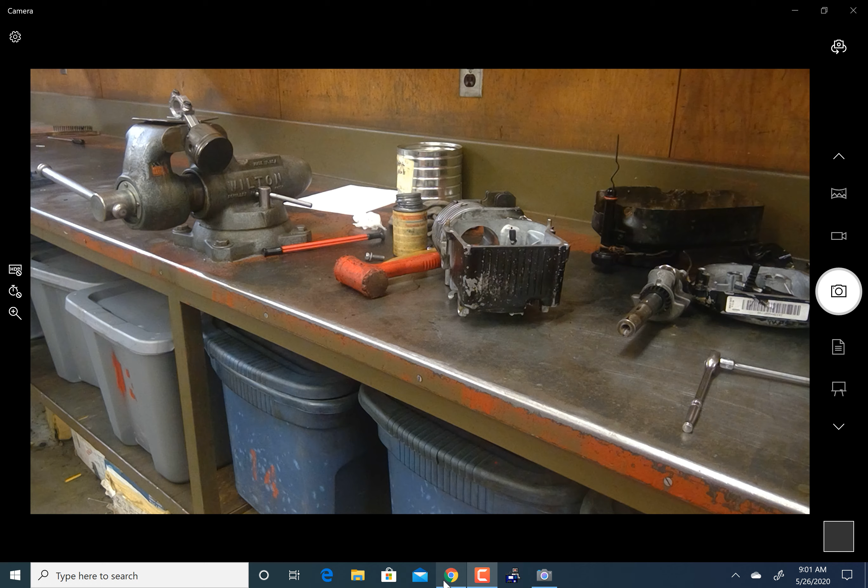Oh, hey, I feel like we were just here. It's time for sheet 7, kids.

Sheet 7 is all about putting in the piston and the rings. That's a pretty straightforward piece of this. If you've seen the 318 video, you've seen me do this.

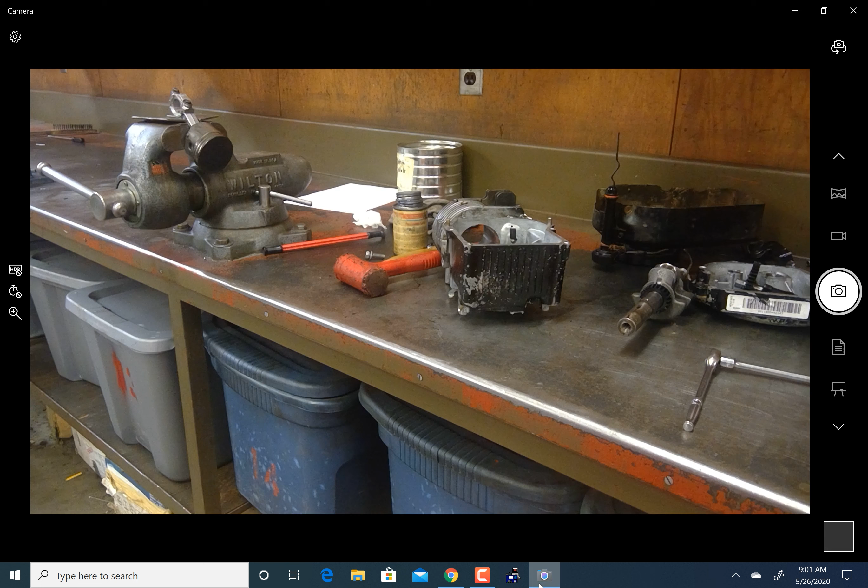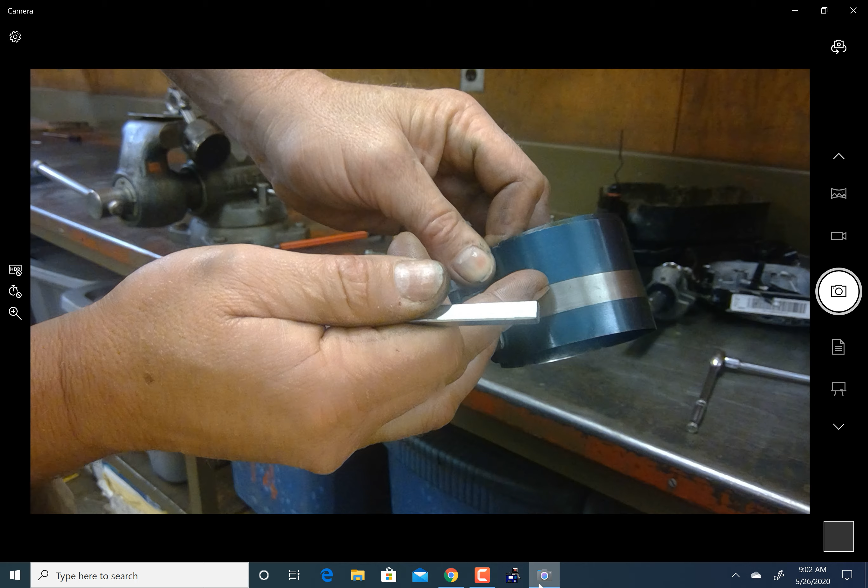We have a smaller version here of the ring compressor I used on the other one. Always want to have the band closest to the cylinder. If you put this side down toward the cylinder instead, it wouldn't be gripping the rings as tight, and they could actually splay out a little bit before you get it in, and then you'd have a problem. That is no bueno, senor, no bueno.

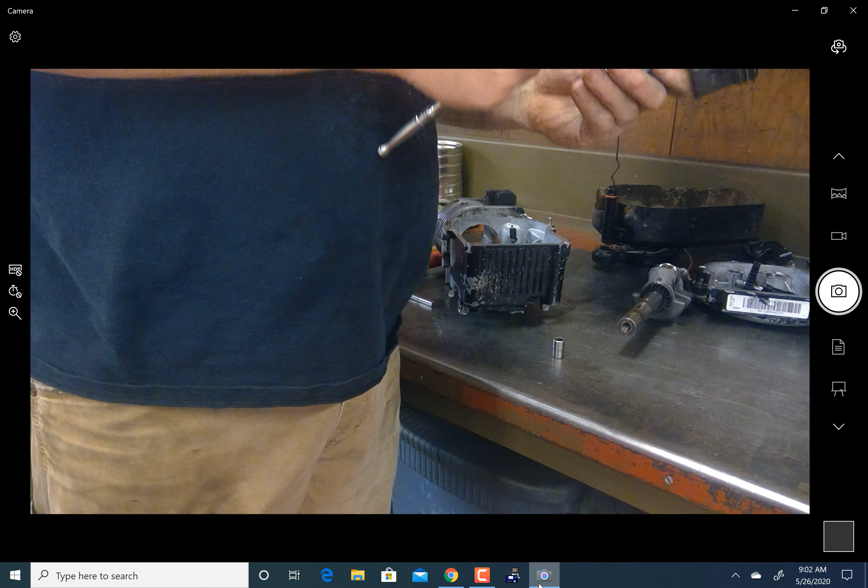Now, some dingbat left the connecting rod on this, which is not the end of the world. It was me, obviously. Don't get yelled at for this, that wasn't Cadence's fault, it's my fault. But anywho, I'm going to go ahead and take it off if that's okay with you.

Judas Priest! It's like someone used a torque wrench. Anywho.

Good Lord. Anyway, so we are going to put this dog in. If you recall from the other day, we were doing it on the big engine. If you've seen those videos, which if you haven't, I don't know what your problem is and what you're waiting for. Worked long and hard on those videos. So anywho, we doing this.

Come on, Betsy, you got this. You got this. Now, there it is.

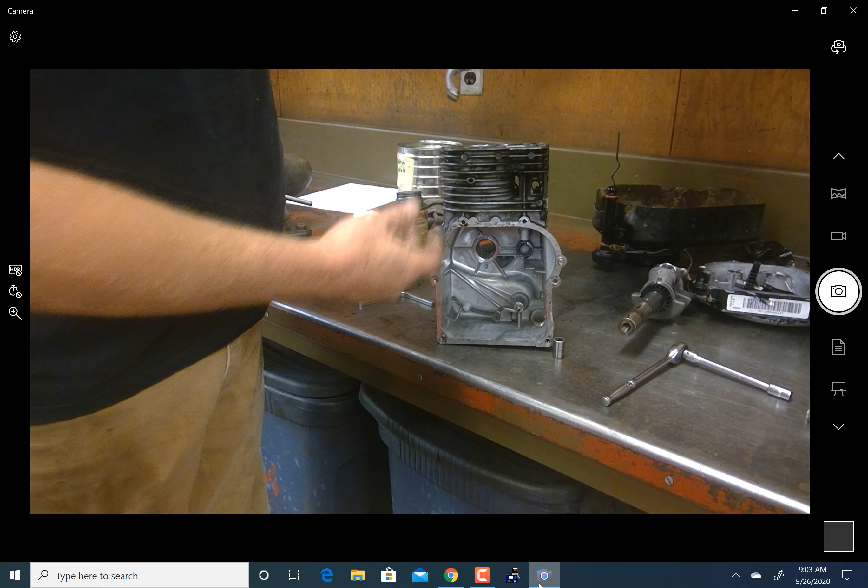Always want to remember when this goes in, we're going to do it so the open end faces toward the valves. Also remember that our ring gaps need to be spaced out, they just don't need to be lined up. Now, the page says about 120 degrees. That's cool, it's whatever. Only the compression rings really, really matter. So make sure they're spaced out good.

I'm going to grab some oil real quick. Apparently that ran off too. It's like everything's working against me today. OMG, Osh. OMG, Osh.

We are going to put a little bit of oil in the cylinder like we did on the big motor the other day. Just lube it up just enough to help slide it in.

Ordinarily, I would dunk these in oil as well. I was going to say it would make a big mess, but maybe pouring on it makes a worse mess. I don't know, I was just trying to save having to waste some oil and make a big mess, but apparently making a big mess happened regardless.

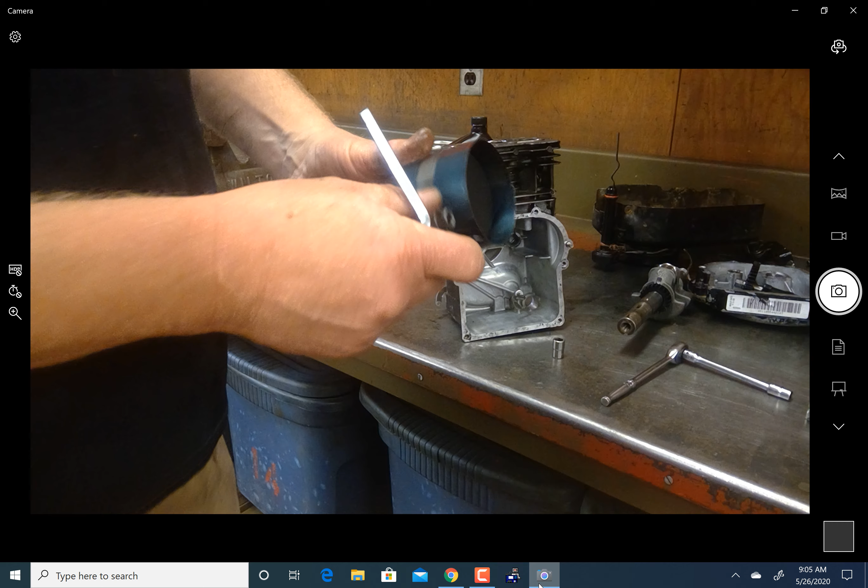Here we go. So we have it here. We're going to slide that over our piston and rings. Come on, get on there, you hippie. Now, you're going to want to have part of the skirt sticking out the bottom. You see that? Don't get carried away, you don't want this all the way to the bottom. If you go all the way to the bottom, what will end up happening is you have no real way to line up the piston with the hole properly.

Again, connecting rod, open end goes that way. This is a tricky one to run because unlike the one from the big engine, this one does not have a hold down lock situation. So I'm going to hold it with one hand and tap it in with the other.

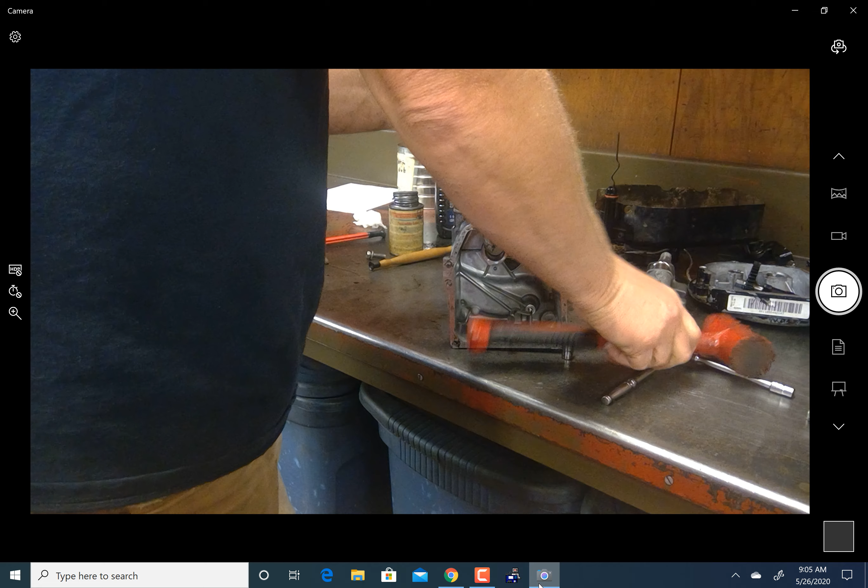Oh, it slipped on me. Darn it. Oh, I think she slipped. I might have to start over again. Darn it, she slipped on me. Rats.

Okay, so what had happened there was it slipped out of the bottom, the top compression ring slipped out before I was able to drive it all the way in. Worthless beggar. So I'm going to tighten her up again.

I'm going to go ahead and set it on the top of the piston there. The piston in tight, just inside. Oh, get up there where you belong, you hippie. Just inside the hole, I'm going to snug her up.

Now the tricky part is being able to hold it tight while tapping it. There, she's in. Woo! Now, you'll notice it twisted on me just a little bit. That's easily remedied, friend, okay?

Now, you don't want to get down too far because one of our next steps is going to be putting in the crankshaft. We got to leave room for him to go in.

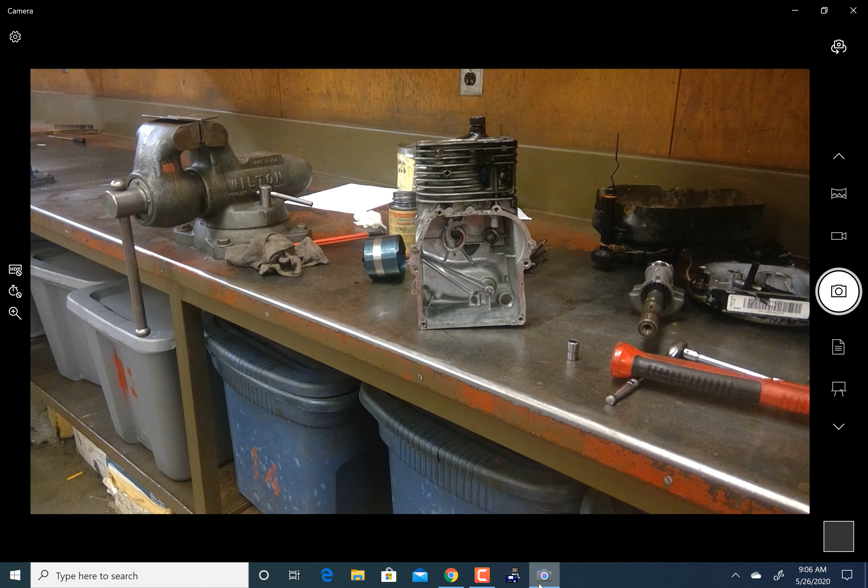Goodness sakes. These little engines aren't too much, but sometimes they're annoying because they're so small. I suppose it'd be like trying to work on a little kid, squirming all over the place. If you were a doctor, you know what I mean? A normal person would sit still, but a little kid is all over the place.

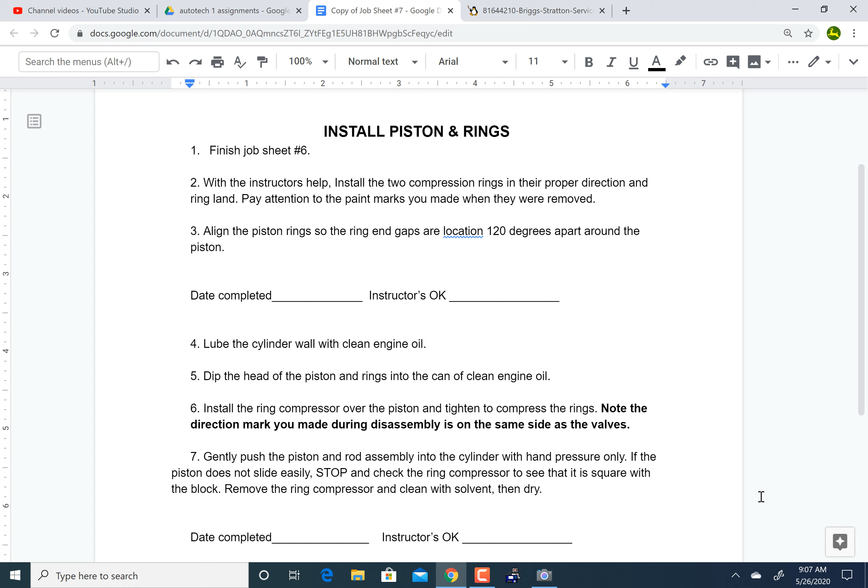Here we go. There we go, did that. What would happen if you put the rings in upside down? Listen, anything to do with rings has to do with compression. You with me? Boom, okay, done.

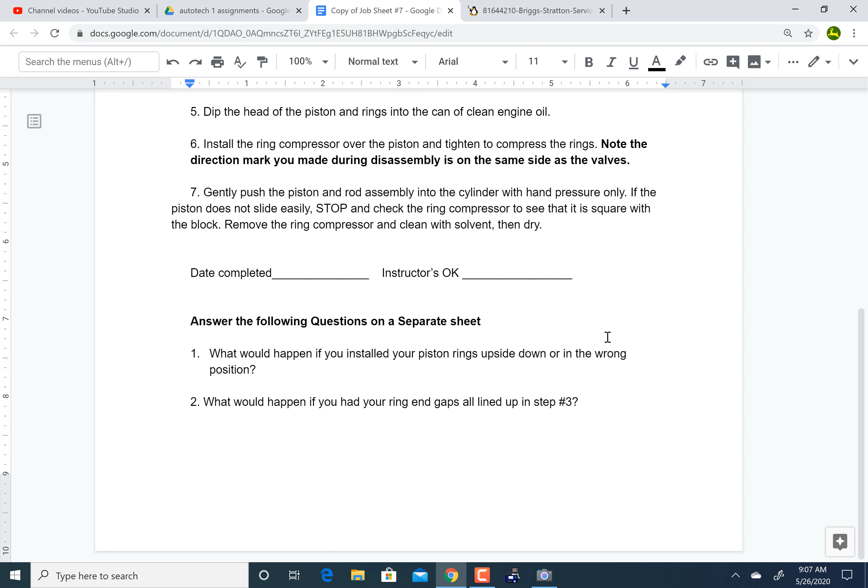Now, what we're going to do—I'll clean the compressor up later, I'm not going to do it now. Let me tell you, that's the thing that pisses me off more than anything else, dealing with kids. It says clean it up. What'd you do, put that oily nasty thing back in the toolbox, Mr. Groom? That's cool, man, all right.

So what we're going to do is this: put in the valve lifters, they already have lube in them, we'll stick them back in. We're going to coat the crankshaft with assembly lube and put it in. We're going to push the piston down, put it on the connecting rod, and torque it down. Then we'll install the rod cap at the right torque and get it going. This is pretty much the same as what we did in the last video, so I'm not going to spend an hour going over it again.

The one with a little yellow paint on it was my exhaust. Remember, intake is the bottom one, exhaust is the top one here. Already got lube on the crankshaft, so I'm not going to fool with that. Here we go in.

What you'll notice is that once you get in there, that connecting rod's kind of in the way, so lift it back up. Keep your hand on top of it though, because you do not want to shoot it out the top of the cylinder—that would be very annoying. If you're careful, you can push down on the piston while turning the crankshaft.

It's a very challenging thing to do appropriately, because you've got to bring the whole shebang down to the bottom where you can get around and put the rod bolts in. So you can see I've got it down here at the bottom now where I can get at it. Oh damn it, you can't see that. Judas Priest.

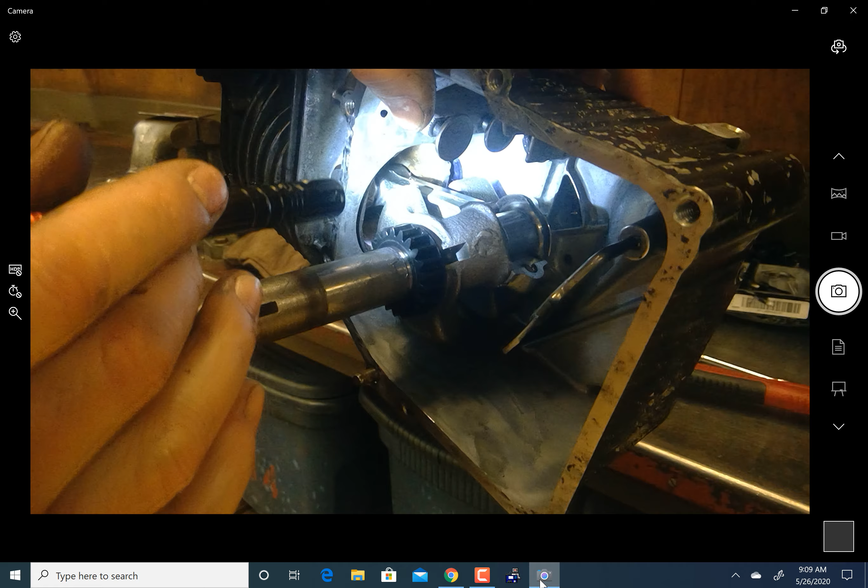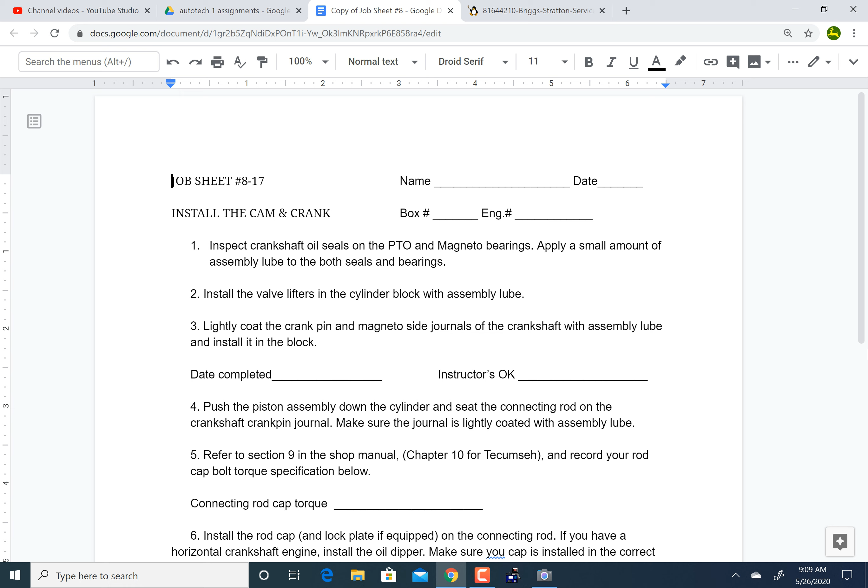Now let's go back and look at our sheet. We've got all that on. Let's make sure we dot our I's and cross our T's here. We did not look up the rod cap torque yet, we'll do that momentarily. We're going to install the rod cap and tighten it down. Nice, there you go, beautiful.

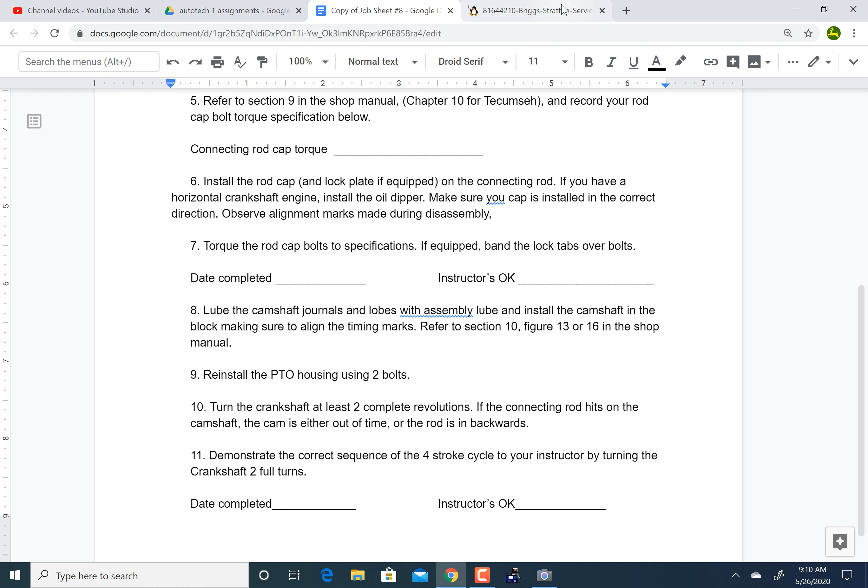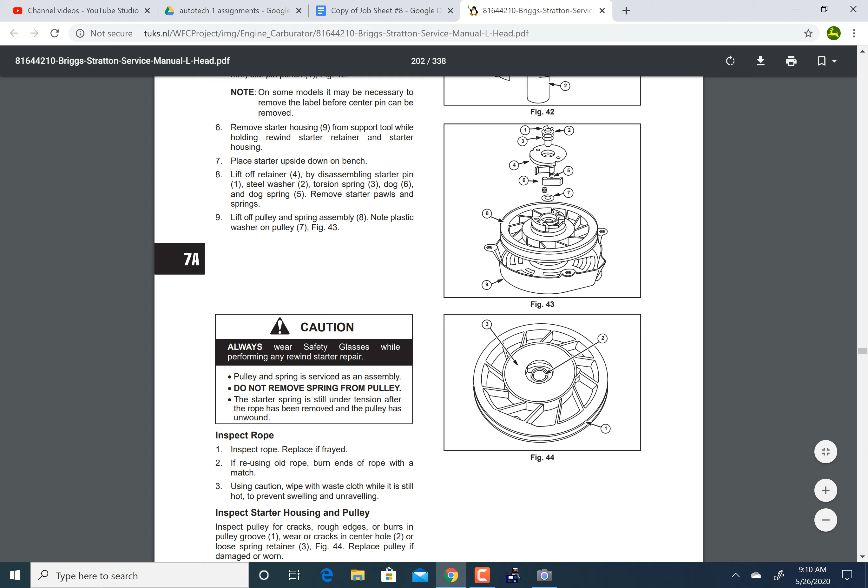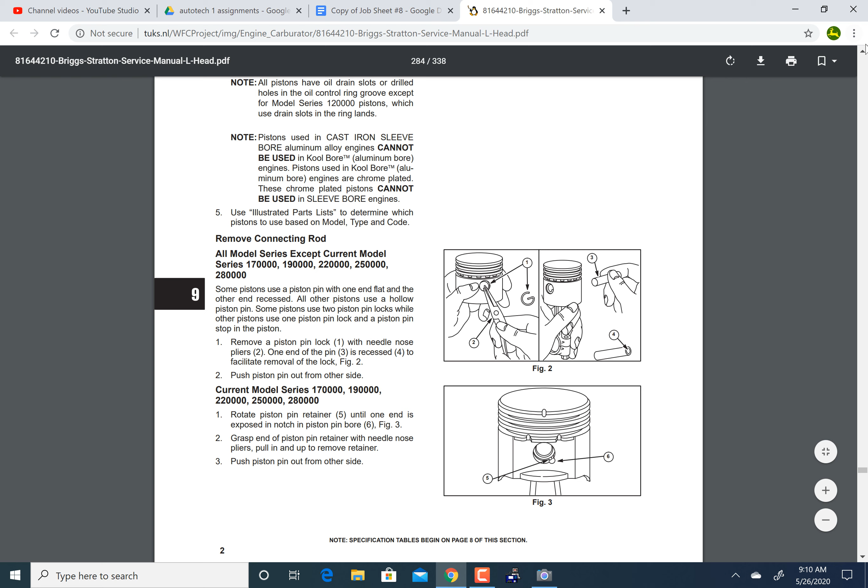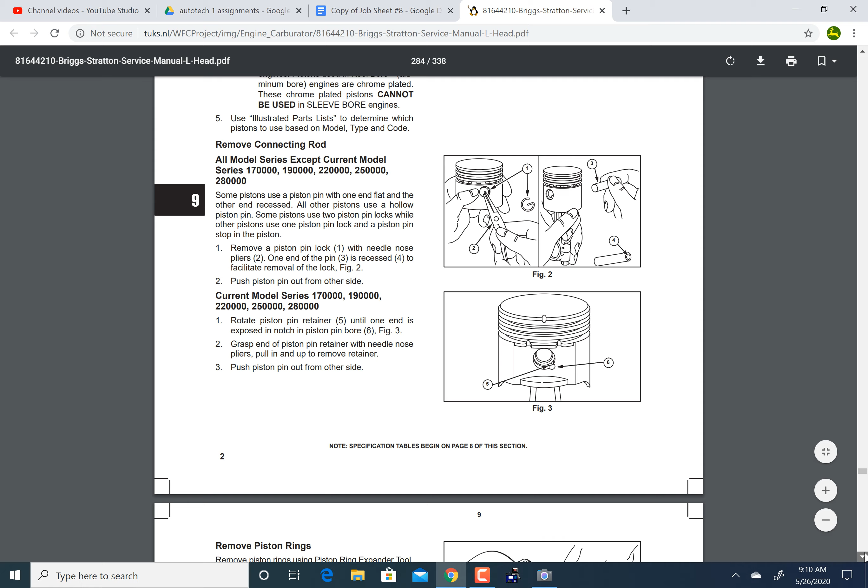Let's go look at the manual. That was in section—what did I say? I forgot—section 9 of the shop manual. And if I was smart, which no one's ever accused me of, I would have written it down the last time we had the connecting rod off when we were checking specs for the clearance. If I was smart when I torqued it down the other day, I would have written it down. But I'm not that bright. So here we are, checking section 9 now at this point. Let's see if we can find it. Up—okay no, down—whoa! Let's go, friend, to the bottom, to the bat cave.

Connecting rod reject size. Rod screw torque, 100 inch-pounds. I remember that from the other day. That's right, 100 inch-pounds, that's what we're going to torque this down to. We'll put a little bit of lube on that while we're here. Free lube.

Make sure you line your paint marks up. Again, that's kind of a big deal. Kind of a big deal, I feel like, you know. I feel like it's a big deal. It is, you are not wrong. To quote Joe Biden, former vice president, it's a big effing deal, man.

Alright, so we're going to torque these babies down to 100 inch pounds. Remember, 100 inch pounds is like 8 1/3 foot pounds. Why is that? Because an inch is 12 times smaller than a foot, so in order to get the same amount of force, you'd have to apply a lot more force on a much shorter arm, a lever.

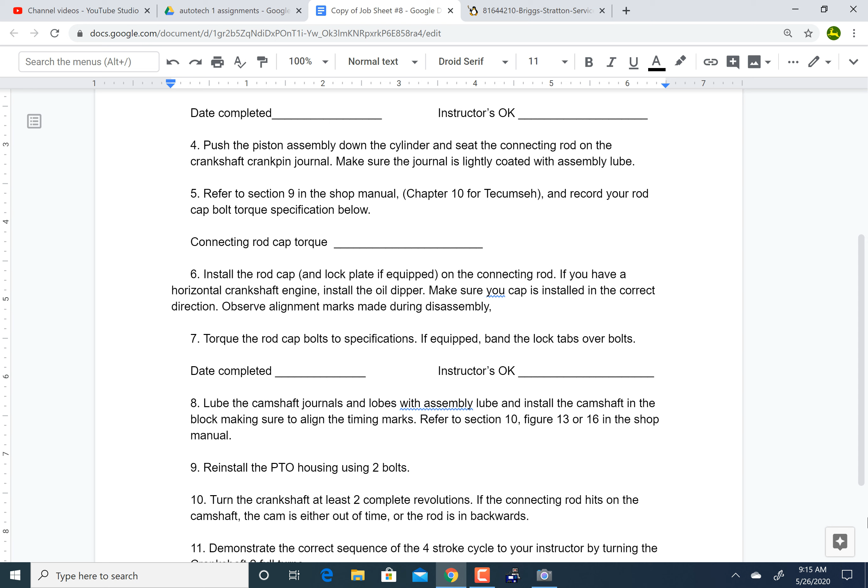Whatever. Okay, now we're going to reinstall, using the 2 bolts again, same thing we did last time. And we're going to demonstrate the correct 4 strokes, and you're going to tell me how that works and so forth. Nice, and you can turn it 4 full or 2 full.

Well, you're going to turn it around a couple times, right? Now how many times are you going to turn it? Well, let's see if you remember. I mean, it tells you, but let's just see here.

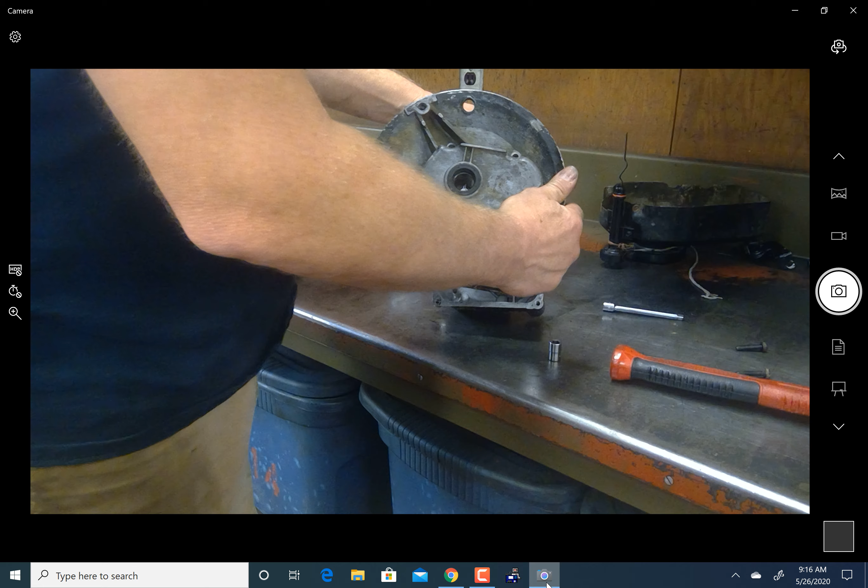Here we go, yeah, again I'm going to put that side cover back on, the PTO cover, and put it back on. Remember, round goes toward cam over there. Again, kind of hard to screw it up though. Line up your dowels, give a little tappy.

Alright, get a couple of bolts here, it doesn't really matter where you put them. Okay, all you do is snug it up to make it so that everything rotates appropriately inside. Nothing's going to get bound up because it's loose in there. Come on now.

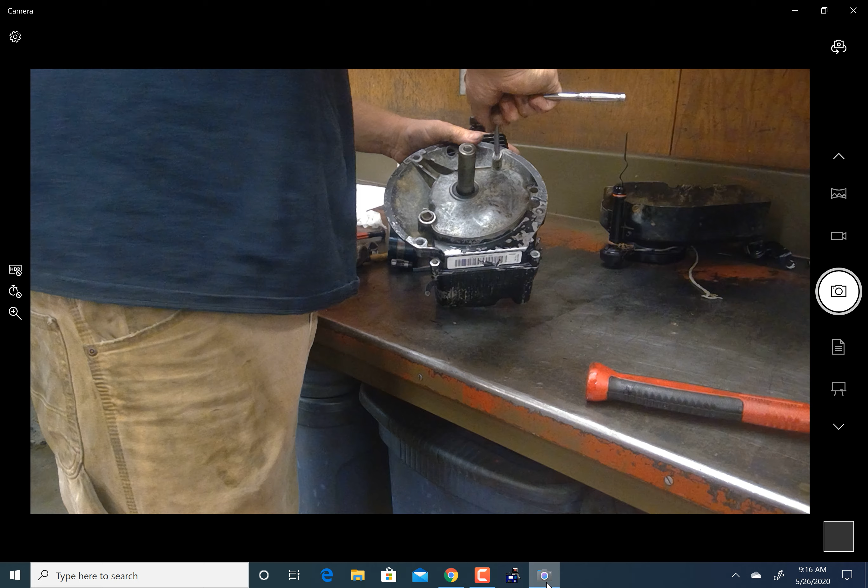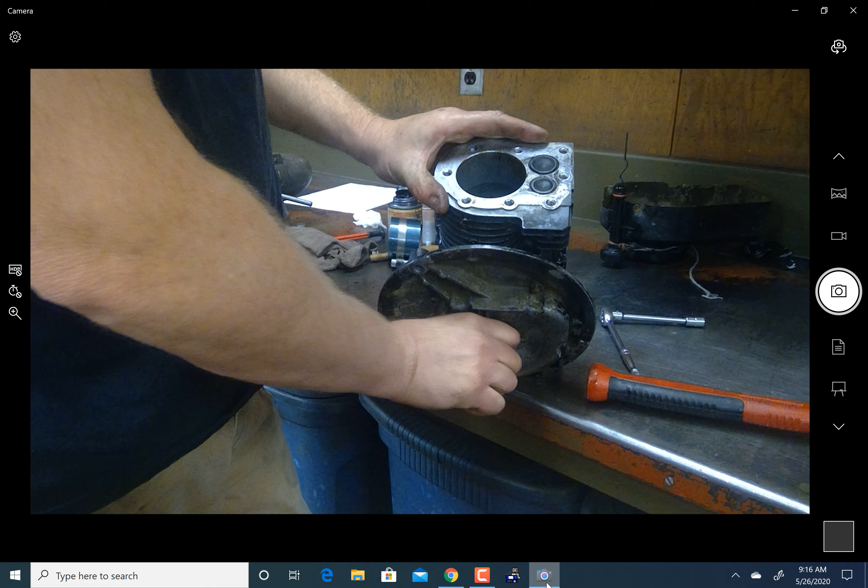So are you watching? Are you watching? I guess you are. Alright, here we go. So as I turn this baby, piston's up. Now piston's going down, but both valves are closed. But look, piston's coming up, and what do you got here? Well, the intake is open. Well, that's just freaking weird, dude. So what does that say? It says I'm going about this backwards. Okay, what I should be doing is turn it this way. So turning, piston going down, intake up. It's coming up on compression.

Boom! Spark plug fires. Down she goes on the power stroke, the one we all came to see. Up she comes on exhaust. Voila. Do it again, okay?

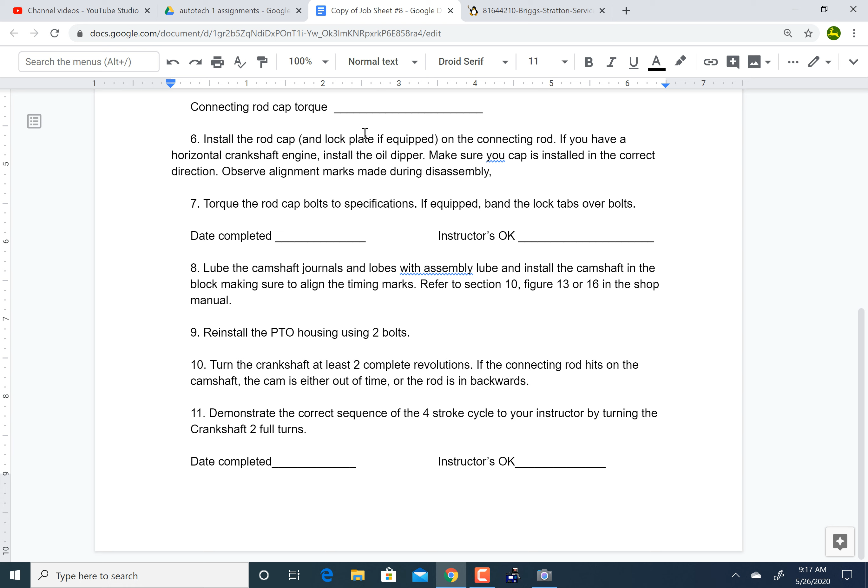Okay, we've already installed all that. Now we have to put our governor in, and the oil pump. We don't have an oil pump when it comes to that, and then we're going to use a gasket and take care of some of that stuff. Let me get some of the gasket sets ready to go, and we'll get right back to you.

Okay, so here we are, taking the side cover back off from last time. First of all, this little washer goes against our cam gear right there to protect it. Then this, remember, is our centrifugal governor.

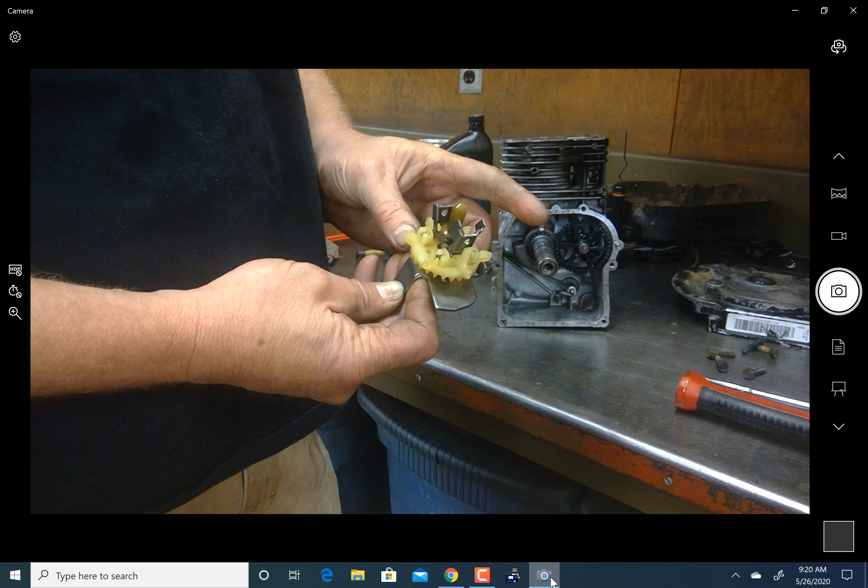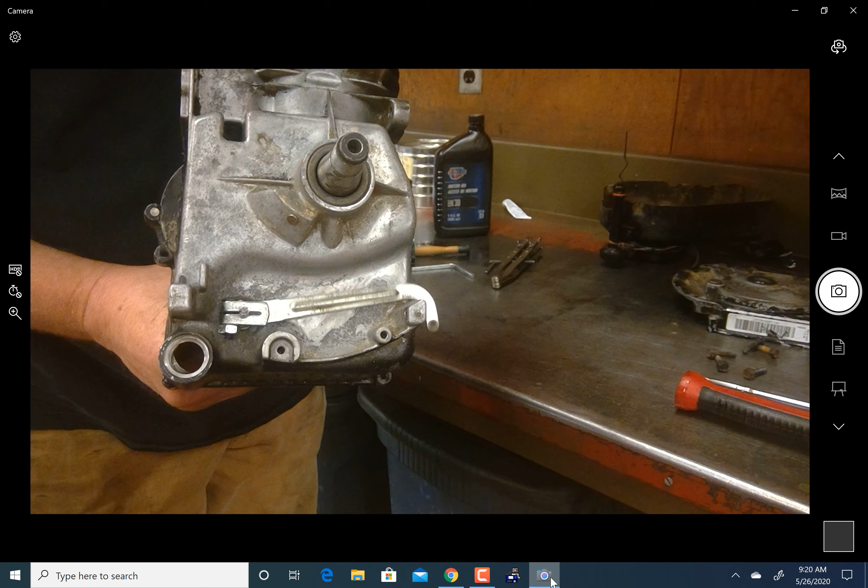The faster this spins, those little arms kick out. You see that? So when it kicks out, it pushes this little lever out like so. And when it pushes it out, it pulls that lever like so. You see that? Yeah, and that slows the engine down because it lets the throttle off.

This baby just sits on there. I don't see a lot of lube on there, so I'm going to put just a hair more lube on that, just for a good time, if that's okay with you. A little bit more on this guy too, since I've had it off 3 or 4 times now. Okay, there we go, cool, nice. All right, so there we go.

This just sits on like so, but the important thing is this little plastic piece has got to be right on the end of this lever. Do you see that? That's a big deal, can't oversell that. It's a big, big deal.

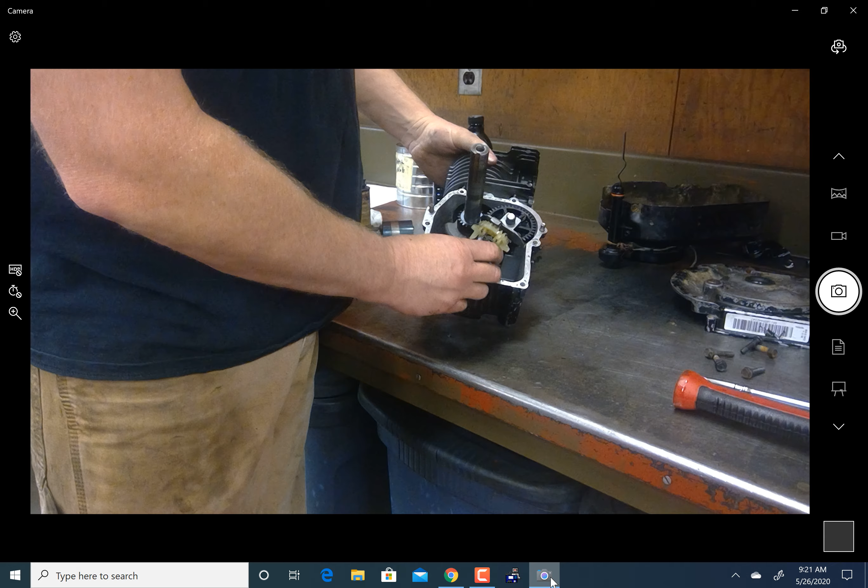Now once this is on, you see this big Humpty Dumpty here, that is what sits over. It doesn't allow it to move once you get it all ready to go.

So let's double check our instructions one more time here, and then we'll continue on with our process. There you go, I did that. So let's go look up the cover specs.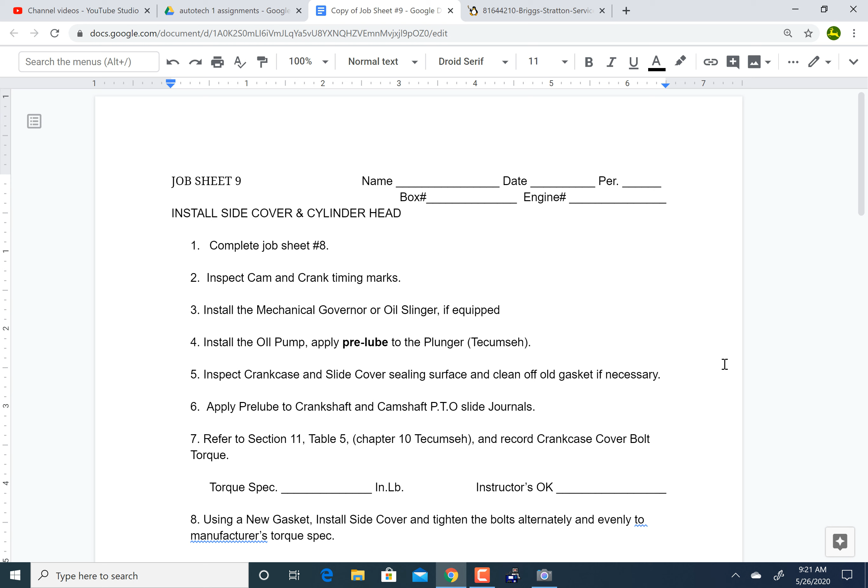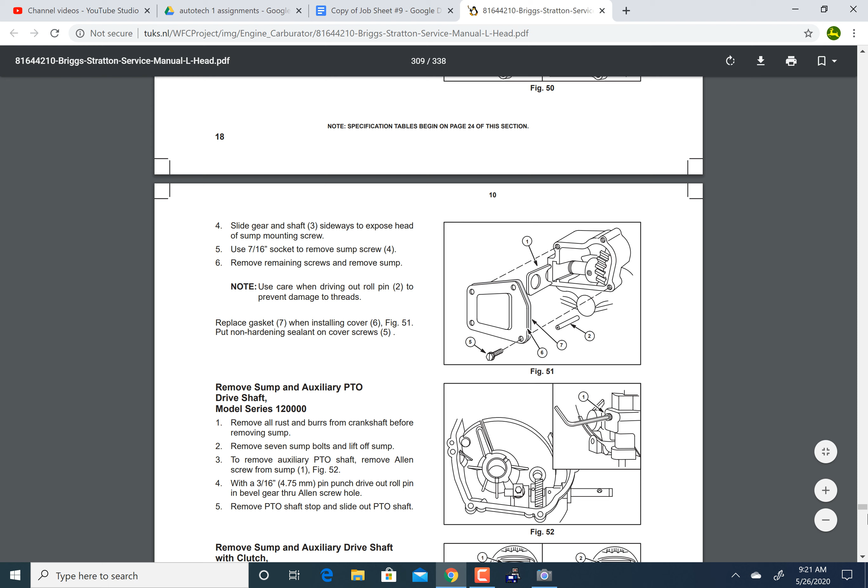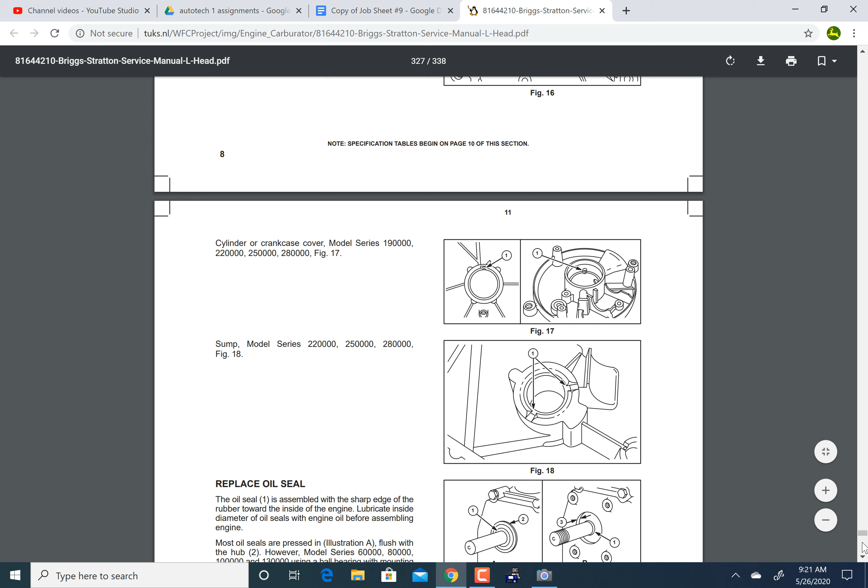This is in section 11, table 5. So section 11, table 5, let's just go find it while we're here. Are we in 11 yet? Yep, table 5. Table 5, I said, there you go.

So it looks like 85 inch pounds. Okay, 85 inch pounds, that's what our side cover bolts are. Now we said we need to make sure that we use a new gasket.

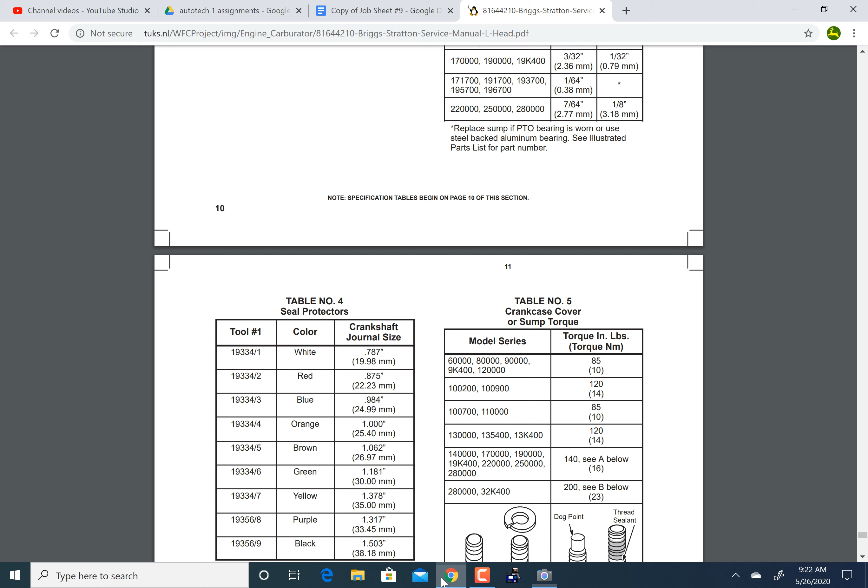Okay, so back over here, we're going to go ahead. Oops, I was going to look at the instructions first, sorry. So our instructions are here: using a new gasket, we're going to tighten them down to the manufacturer's torque spec, which is what we said. There you go, cool, and here we go.

So here are our new gaskets. Oh, fart. That's what you get for using scissors, you should have ripped it open.

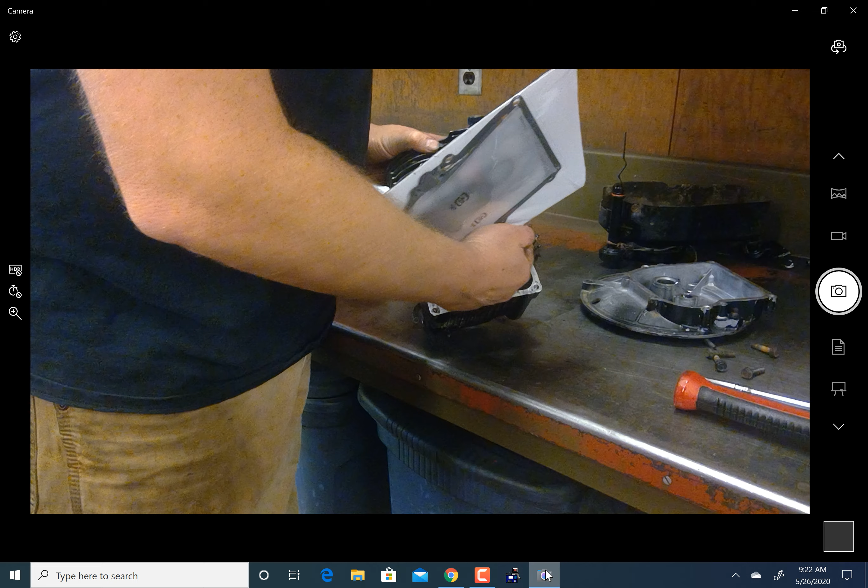No, now if you were in class, I would yell at all of you at this point, stop you. It comes in a little package like this, okay? You don't want to rip this whole package open, because literally everything will spill out if you do that. So you want to just make a little slice across the top of this deal.

And I'm kind of keeping these videos for maybe in the future, if we ever have to do some crap like this again, I can just pull them out and go with them. Or if a kid misses class, I can just pull them out and go with them.

Now you'll notice that there's a couple of different size side cover gaskets. In theory, they're slightly different widths, so that if you had a situation where you had a little extra backlash, if you're really rebuilding an engine, you might go into a little deeper detail. In reality, it doesn't make a whale of a difference for what we're doing purpose-wise.

Lay it on there, okay, make sure it's lined up, all the holes are lined up properly. Okay, going to get our cover on. Again, make sure that's on the little lever before you get started on this.

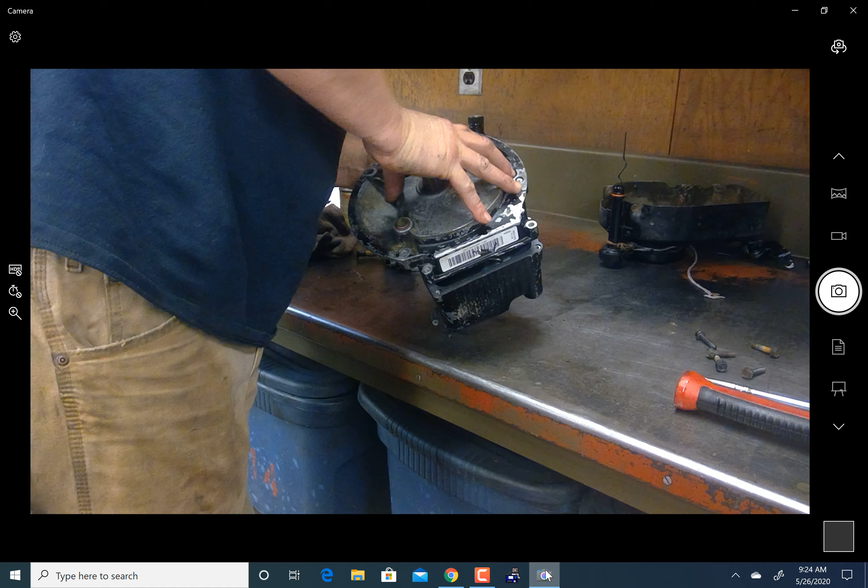Stop moving, like you're a freshman or something, don't listen to me. Hey. All right, tappy. Nice, here they are, it should be 1, 2, 1, 2, 3, 4, 5, 6 of them. Again, I'm just going to run around and snug them up first.

Let's torque them down momentarily.

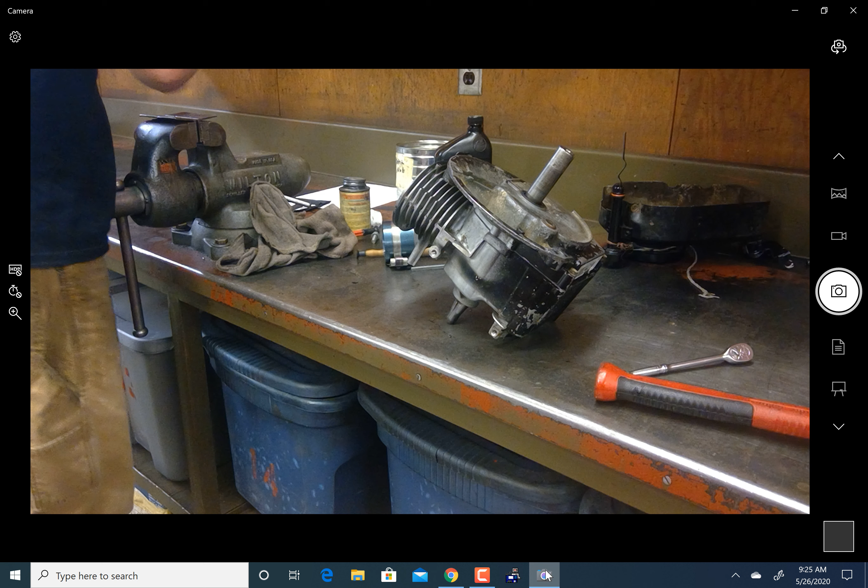Last one. Now again, if this were a situation where you're doing a full rebuild, this particular kit we order - oh, I got some new ones, actually it came with them this year. This seal can be changed out, as can this one. Normally I don't order those because my kit doesn't always come with those. It's hard to find these kits that are like the perfect kits this year. Apparently I found them on accident, I hadn't really looked at them until just now. Obviously I just opened them up. But if you have those, you certainly can change those as well.

One thing I would caution you on, if you didn't have to, is that you can actually mess stuff up driving the old one out if you're not careful. Although it'd probably be a good skill to know.

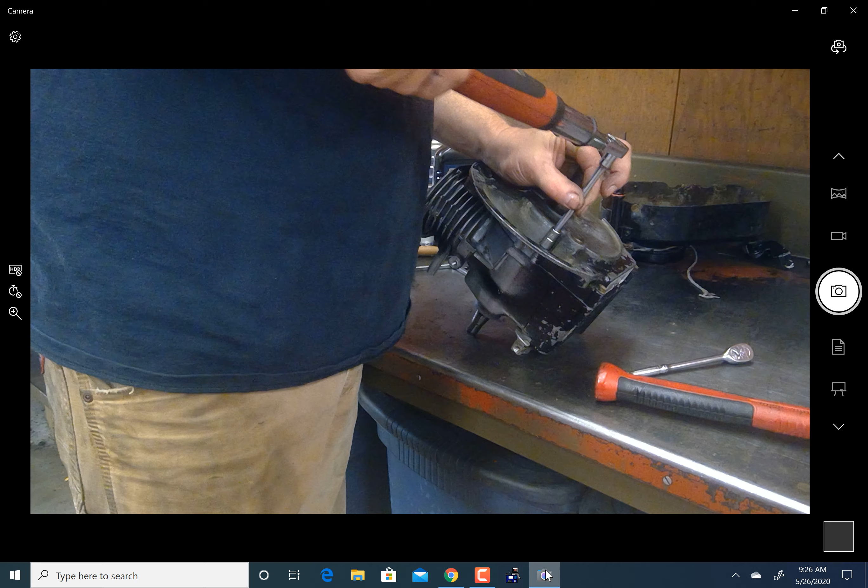So we're going to go side to side here, kind of a star pattern-ish, right across. Pretty much always want to do this when you're torquing in pretty much anything. A lot of things give you a pattern to follow; if they don't, just go side to side, back and forth. It helps so we don't get one side torqued down too much and get a little bind.

And then lastly, after I've torqued them all, I like to just go around the horn one more time, just to double check that I didn't miss anybody. That's just my own personal preference, but to me it makes the most sense, especially on a wheel - I never want to miss one of those.

A couple years ago, I guess it was last year, one kid had done my brakes here in the shop, which is fine, but he didn't torque my wheel down - two of them, I think. Anyway, I went on the road and there's this weird boomity boomity boomity, and I'm like, what is going on? This is so weird. Well yeah, the sucker didn't tighten them down. It kind of freaked me out - it could have been really dangerous.

Okay, now we're going to put the head on. My head is laying over here, here are my head bolts, like so. We'll look up the torque spec momentarily - let's go ahead and get these started.

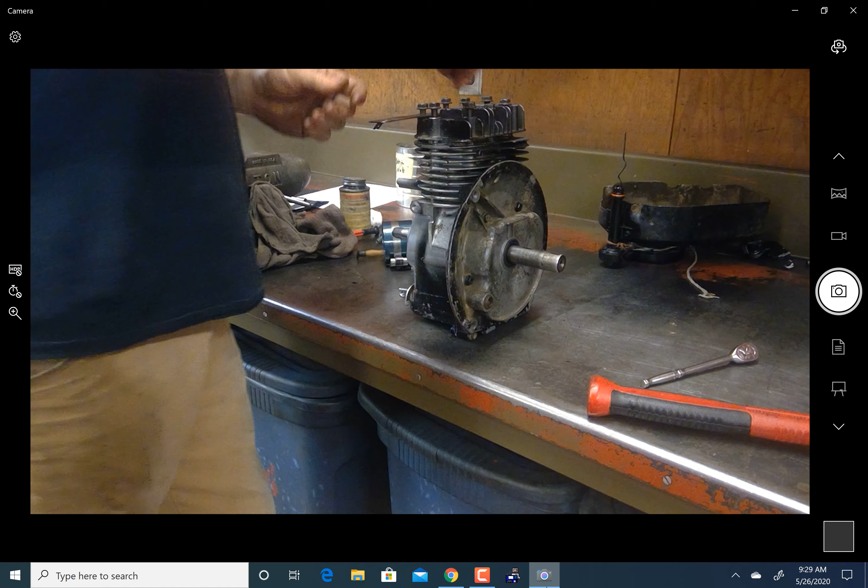Like a fool, where is my extension? We'll look up the torque spec momentarily - it's not a huge deal at this time because I'm not over torquing them, I'm just snugging them up. Again, we'll do the same thing, kind of a crisscross pattern. When we go to torque them down - but for right now, we're just snugging them up.

Oftentimes on a big engine, they'll say to take them down to maybe 50 foot-pounds initially, then go to 100, or whatever. So you kind of sneak up on it. There's one engine we were doing recently in the shop where it wanted you to do it in three steps, something like 50, 90, and then another 90 degrees. I forget exactly. They wanted you to sneak up on it.

That was a torque-to-yield bolt. Remember those are the ones I told you about, one-time use only, and then they stretch, so you can't reuse them. All bolts technically stretch, but those are designed to stretch a certain amount, and then they're done. You can't use them again.

Okay, they're all snugged up. Let's look up the torque spec. It's coming back together, friends.

Now you'll notice that it says put some never-seez on — yeah, we took care of that already. And also it said put a heat shield on. There was no heat shield on this particular engine when we took it apart, I noticed. So you should put two and two together and say, oh yeah, this one's been apart before.

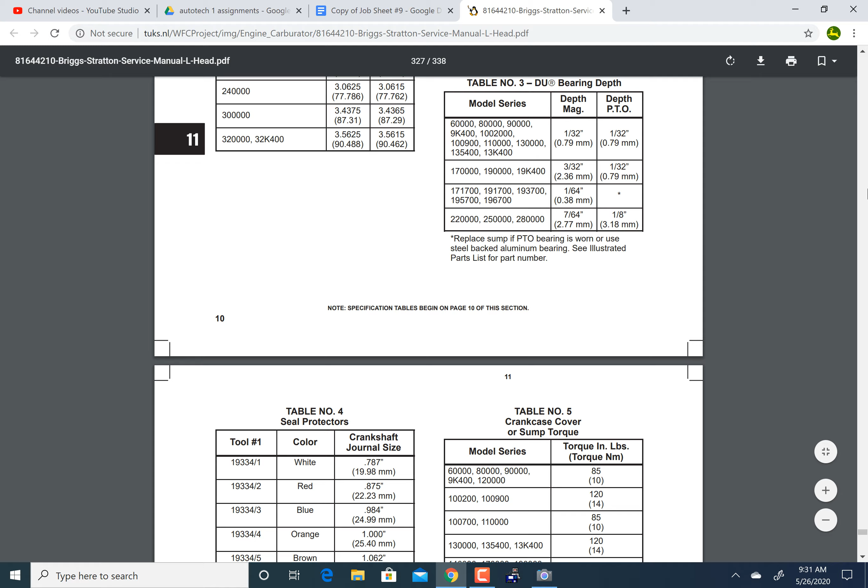That would be section 6 — oh, I gotta go back to chapter 6 for goodness sakes. Anyways, that's pretty clear evidence it's been apart before, because that heat shield had been left off. If it had never been torn apart, it would still be on there.

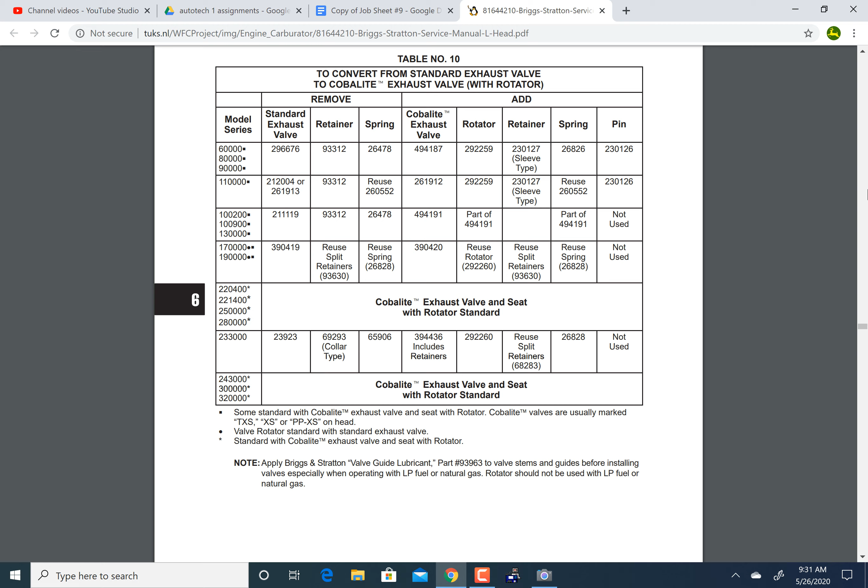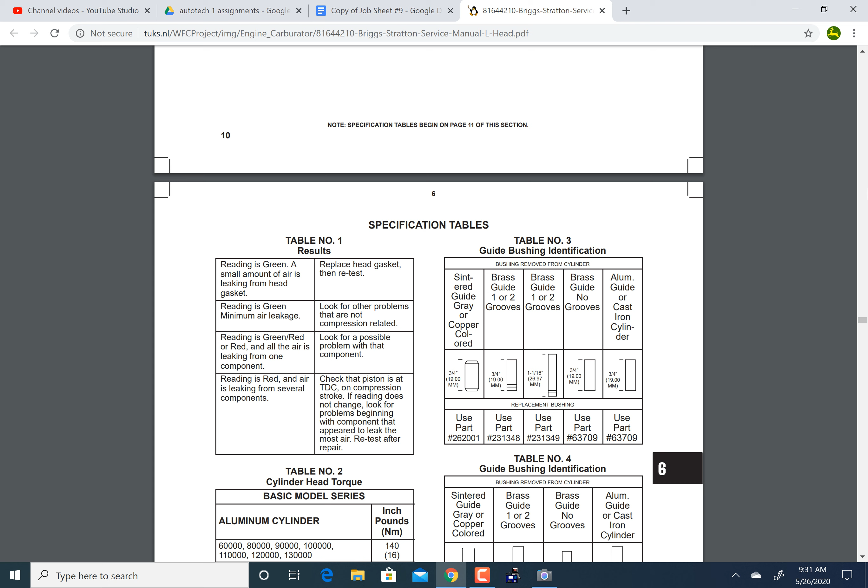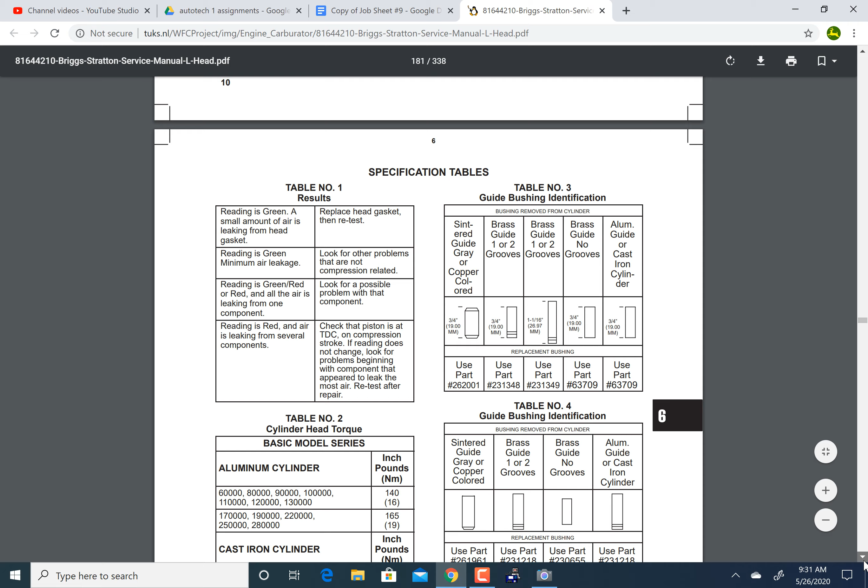All right, we're getting close. Section 6: valve tappet clearance, more valve stuff, cylinder head bolt — there we go. What do you say, friends? Cylinder head bolt. Remember, we have a 100,000 series engine down here, so for our 100,000 series aluminum, it's 140 inch-pounds. Just a trivia question: 140 divided by 12 is roughly 12, so that'd be about 12 foot-pounds.

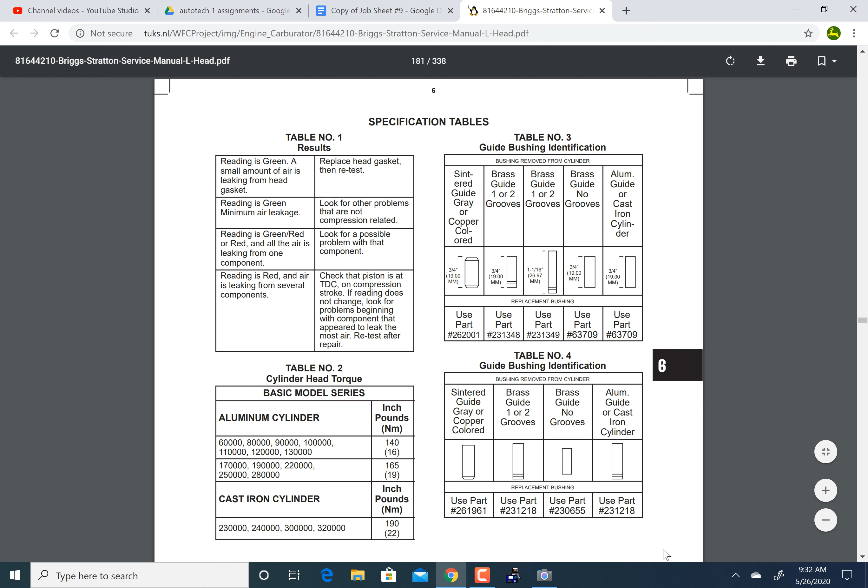Come on, you hippie. Shimona, are we on? Can you see me? You can't see me, can you? Well, you're not missing much. I'm just dinking around getting the old baby cranked up to 140 inch-pounds.

Now again, we're going to go in a star pattern. I'm going to go across from that guy, go back across over to here, just going back and forth. Remember, if this isn't tightened down, the head gasket could leak. Head gasket leaks, we lose compression, we don't run. No bueno, senor. No bueno.

And again, I like to be thorough. I like to double check myself, so I'll run around the corner again real quick on all of them. Okay, there they are, head bolts secured.

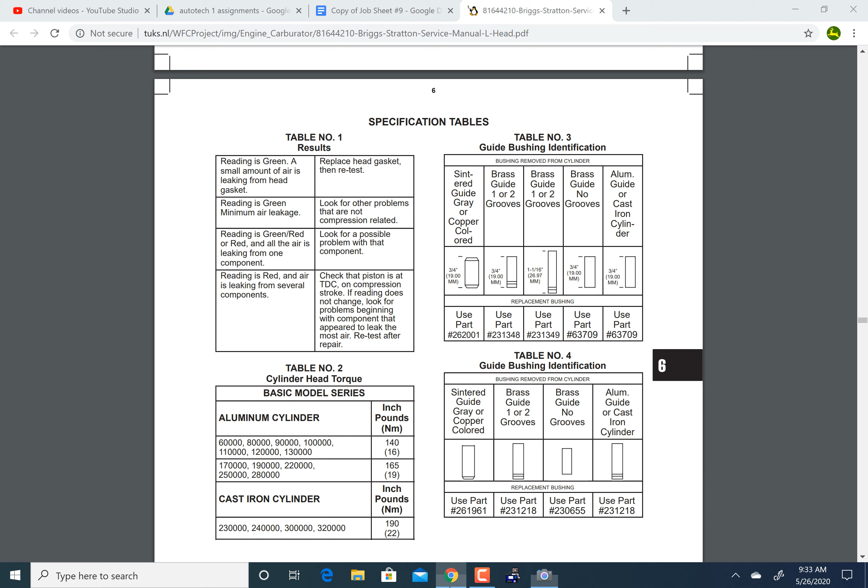Okay, I think that's the last thing we had to do for section 9, but let's double check ourselves here. Section 9, cool — answer the questions.

Remember, the purpose of never-seez, or anti-seize: okay, well technically we were using never-seez when we were doing the lubrication as well. This particular assembly lube, this stuff was actually Honda stuff, and they kind of used it anyway. But specifically, when you're putting steel bolts into aluminum, they tend to gall together, so you need to put a little bit on there.

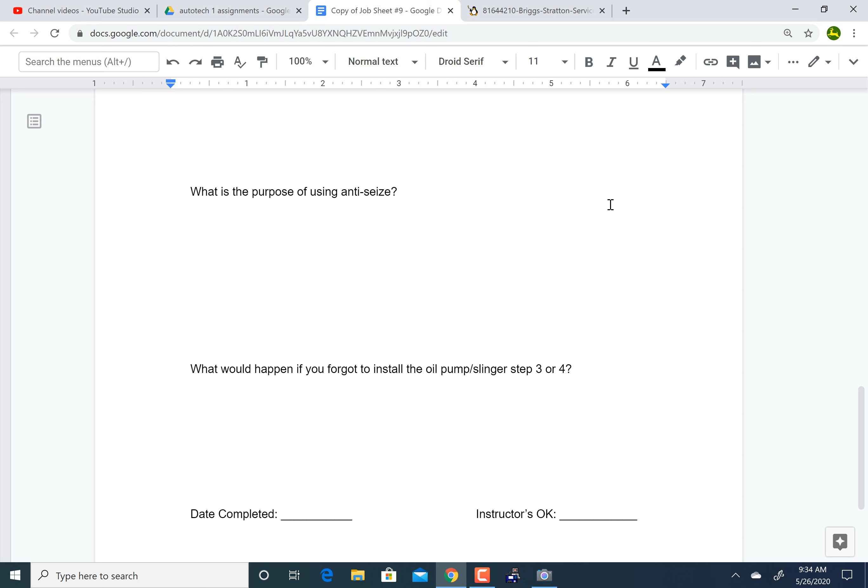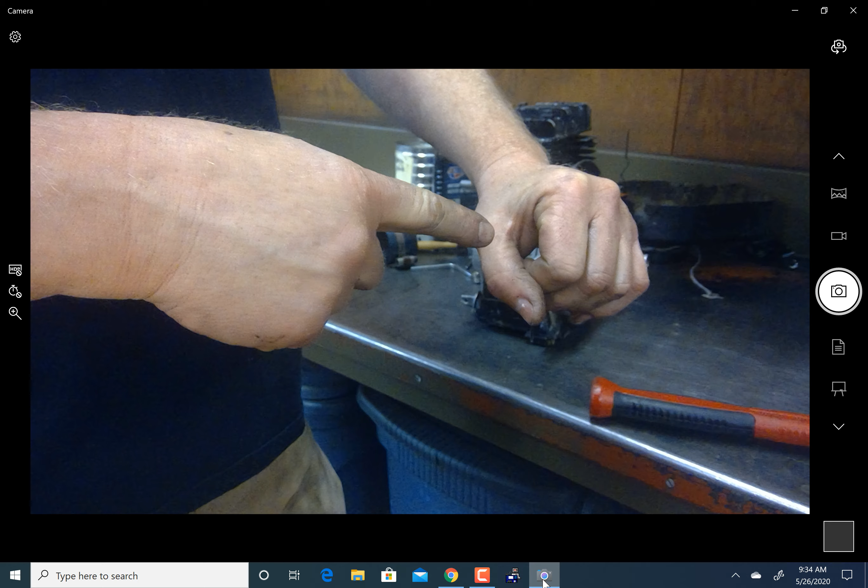If you forgot the oil pump or slinger, what would happen? Well, we don't have a slinger because this isn't a horizontal shaft engine — we have a vertical shaft engine, meaning the thing runs up and down. It's sitting like it's horizontal, but it's not. If this were the way the lawnmower engine sat, it would have a little scooper deal that flings oil around the inside to lube it up. But because ours sits like this, everything runs in the oil. Tecumseh had a little deal, kind of a pushy thing — it would push in, and when it sucked out, it sucked some oil in and forced it in, spraying oil all around the inside of the engine. Kind of a cool deal. But if you had a horizontal shaft sitting the way it is right now, nothing would be lubricated, and your engine would die — you'd burn it up. So there you go.